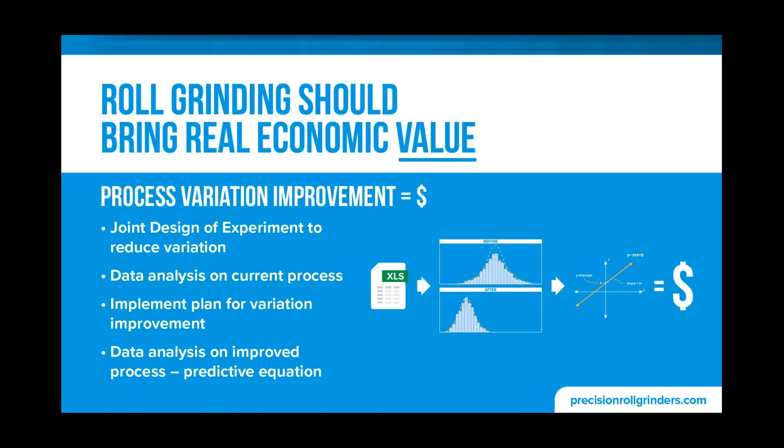We use design of experiments to work with your process and your personnel to really show how specifically we are returning that value in these experiments. These experiments that we do, myself as an application engineer, as well as others that work here, we use the DMAIC process. The design of experiment, the measurement of the current process, so the before and after when we've freshly serviced your rolls or done the grinding on them, and we analyze the data with a Six Sigma process.

Every application engineer and every person who works on these studies is green or black belt certified in Six Sigma. We use Minitab to analyze the data, and with that we can make recommended process changes to help improve the process, and then also to help stabilize or control the process. We've had multiple projects that we have worked on here that we have actually come up with a mathematical equation to predict when your rolls need to be changed out or serviced.

If you leave the rolls in a machine too long, then it's quite possible that you are throwing product away or you are having to slow down your production process. And similarly, with leaving them in not long enough or changing them out early, you are throwing away that money, both in the costs of the shutdown and the product that you're not producing as a result of that shutdown.

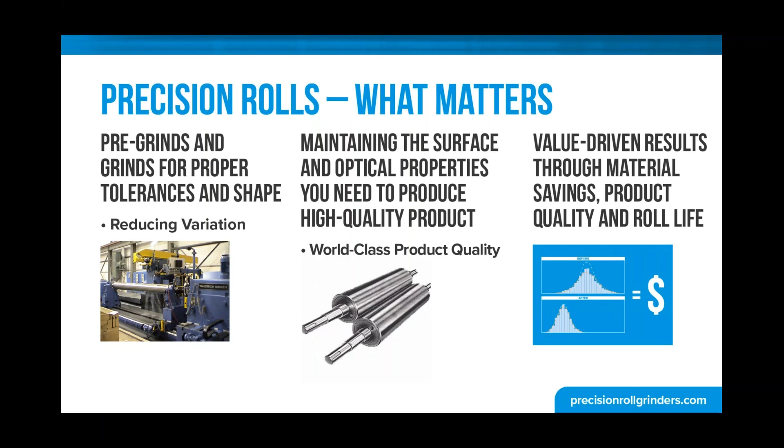I wouldn't say it's overlooked, but a lot of times surface finish is considered something that isn't difficult to do. And while this may be true for some cases, one of the hardest things with the surface finish is being able to do it over and over again consistently. Sometimes it might be able to hit the surface finish here or there, but it's not consistent. We consistently hit the same surface finishes every single time. And then as a result of these world-class services, again, we want to do a study. We want to look at your process and show where that value stream is coming back to you.

So something very unique to PRG is how we grind our rolls. We do not grind rolls in the bearings. The bearings are removed and the rolls are ground on the journals. This is especially critical for those high tolerances because you have the clearances in the bearings and the housings, and you have to eliminate those to get that proper tolerance on your roll. If the bearings are not removed, then it might look in the measurement process that the roll is round, when in reality it's not. Those bearings have to be removed to truly see if that roll is round.

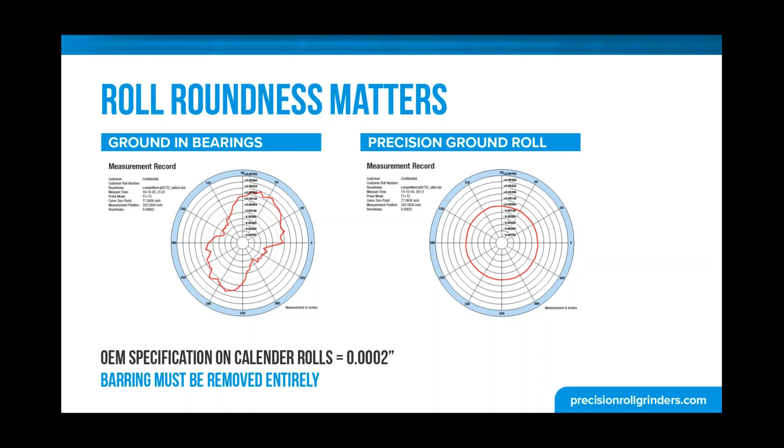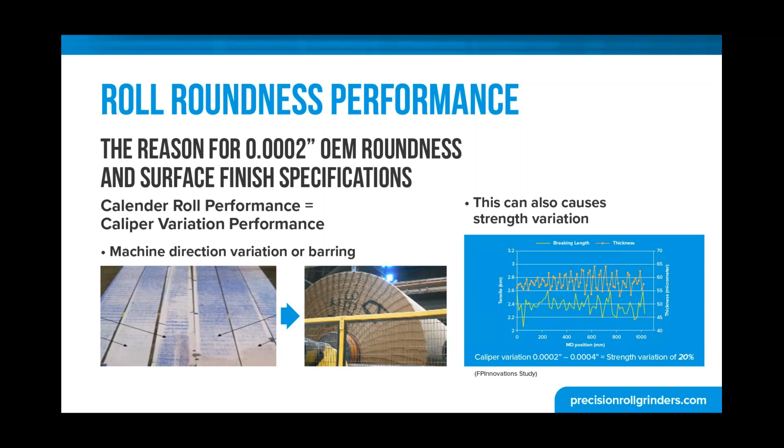Centered roll crowns are also important. In a variety of processes, if the crown is not centered, for example, in a rubber calendering process or any calendering process, you're going to see an inconsistent thickness or caliper in your process. In the paper industry, you might see increased moisture on one side of your web to the other. So that crown is incredibly important; once those rolls are under load, you want them to be completely flat.

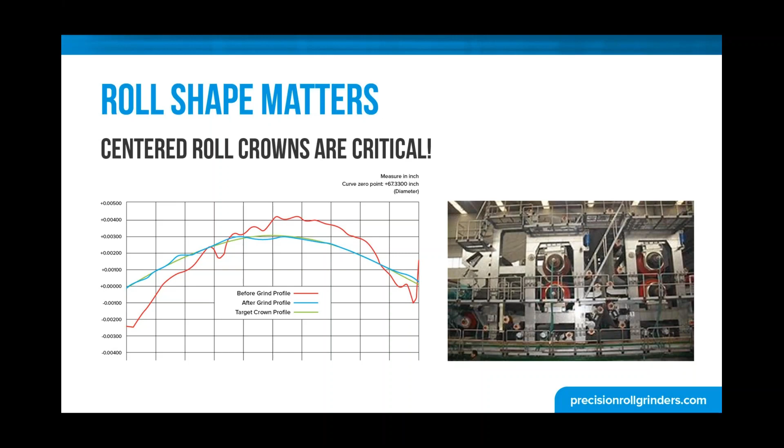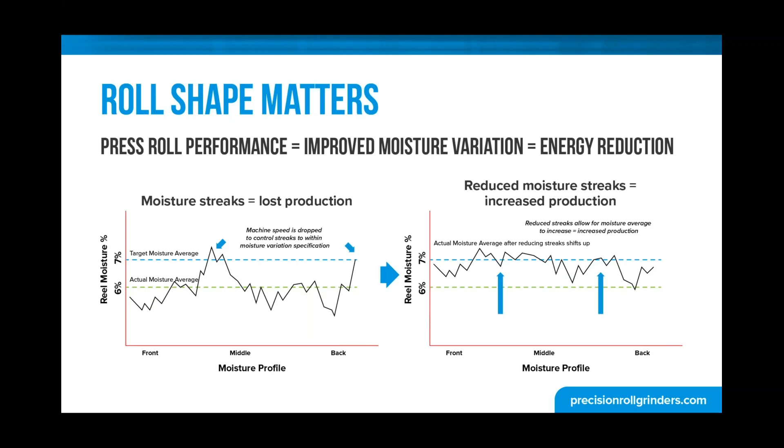PRG is often associated with the calender stack inside a paper machine, but we specialize in all the rolls in that paper machine. Press roll performance is incredibly important in the paper machine. This is directly responsible for a lot of the moisture content in that paper. With proper press roll performance, you're going to reduce those moisture streaks, and as a result, most likely you're going to be able to increase your machine speed, resulting in higher production or increased profits.

It doesn't seem significant. But once you start looking at how much more production, in this case 12 tons extra per day, you end up with a yearly increased production of over $1 million. It adds up very, very quickly, just that slight increase in speed. And one thing that should be said is by reducing those moisture streaks, you're also saving costs in your dryer section. You're not having to dry that moisture out in the dryer section, which can cost a lot of money.

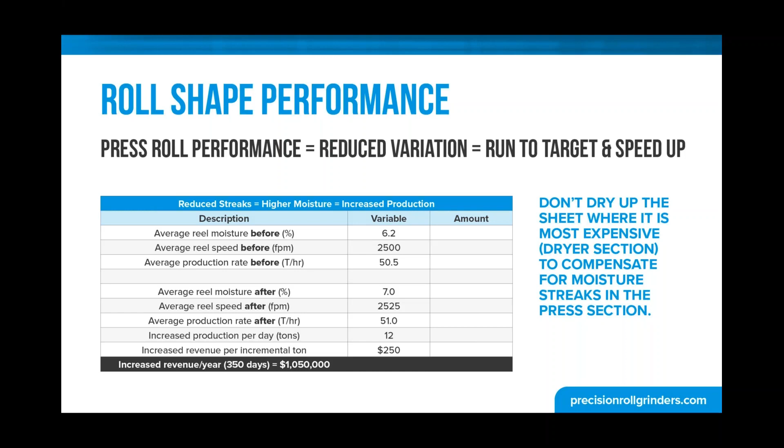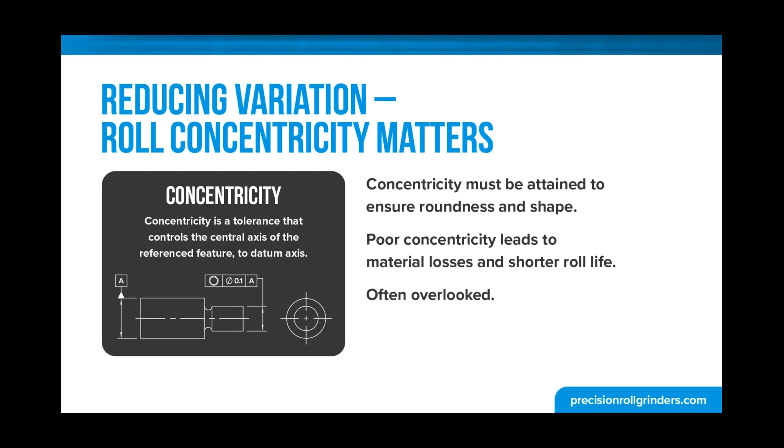Concentricity is something that we take into high account here when we do roll grinds. It's something that sometimes is overlooked or not considered as important as the other dimensions on the roll. And it's incredibly critical. If a roll is not concentric, you're going to experience a lot of the same problems you would see if you had other dimensions that were not ground to the right tolerances. Concentricity is very, very important.

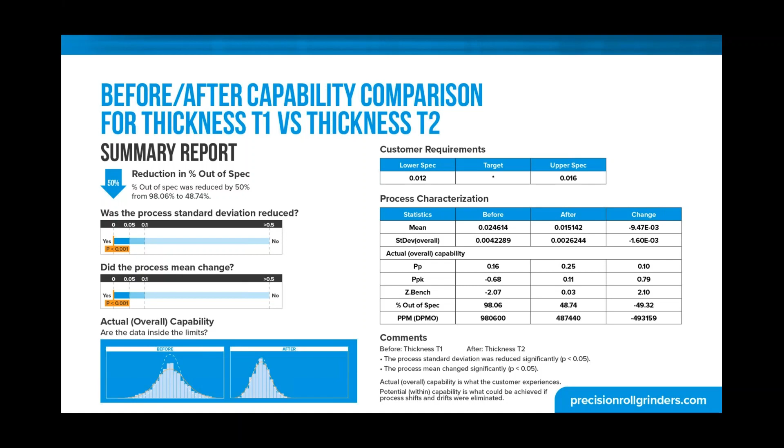This was another study that was done. This was actually in the agricultural industry, and we obtained close to 10,000 data points by hand and analyzed the data. As a result of our roll grinds, we reduced their out-of-spec product by over 50%, which obviously is just a massive gain. And the return on investment here for the cost of the grind was a few days. You can see this throughout all different industries: paper, plastics, rubber, seed oil. You can calculate that return on investment, which is what we want to show you.

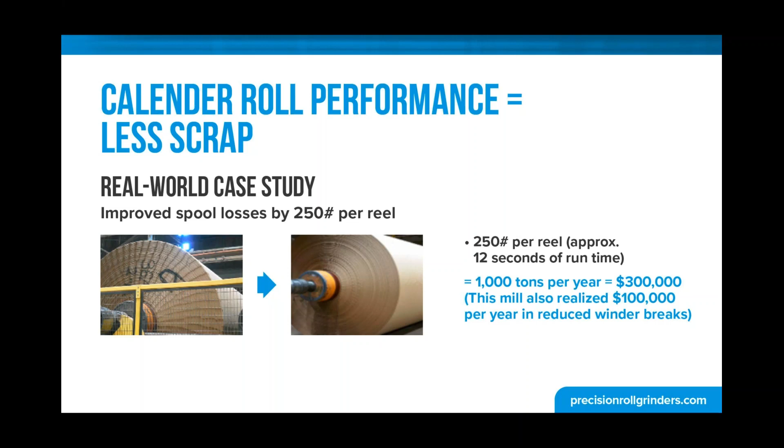So back to the calender rolls with the barring, and the scrap created by barring. You can see an example in that left-hand picture, the corrugation on that reel spool. By having that properly ground calender roll, reducing or eliminating that barring, you see massive savings on reel spool losses. You can run your own numbers and see what kind of savings you're getting, but oftentimes it's upwards of hundreds of thousands of dollars per year just in reel spool savings.

For all our customers, we like to work with them, and sometimes before doing a study and using actual data, we can do an estimate using a simple spreadsheet to see, with our history and other customers, what we might be able to save you, whether it be in scrap or increased production. Now, this is just an estimate, and that's why we like to do those in-depth Six Sigma studies, taking this from being just an estimate to providing you with an actual number of how much you saved or how much increased production or profit was made.

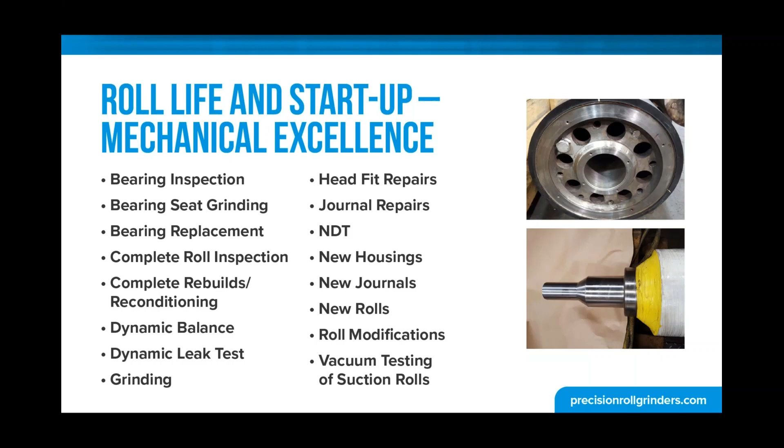At PRG, we are a full service facility, meaning we do everything for rolls. There is very little that we cannot do in-house at a PRG facility. Journal repairs, new roll repairs, old roll damages, NDT testing, non-destructive testing. We can modify existing rolls to fit changes in your process, roll rebuilds with suction rolls, balancing, you name it, it is done in-house at PRG.

Two of the things I want to discuss on that list were bearings in this case. So bearings are very important in your process, just as important as a grind. If your bearing is worn or is damaged, no matter how well that roll is ground, it is not going to run correctly.

So at PRG, we do inspections of the bearings and housings, but on top of that, we bring in the OEM or representatives from your OEM manufacturer for that bearing, and they will do an inspection and provide a report to you as a customer, saying whether or not that bearing is still good to use, all the clearances they've measured, or if the bearing needs to be replaced entirely.

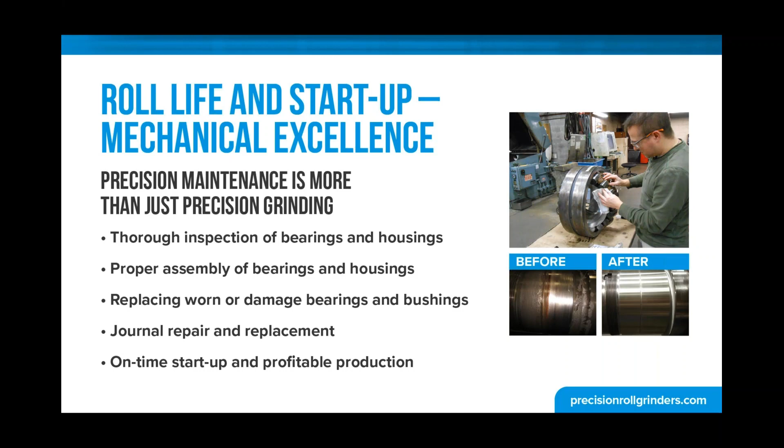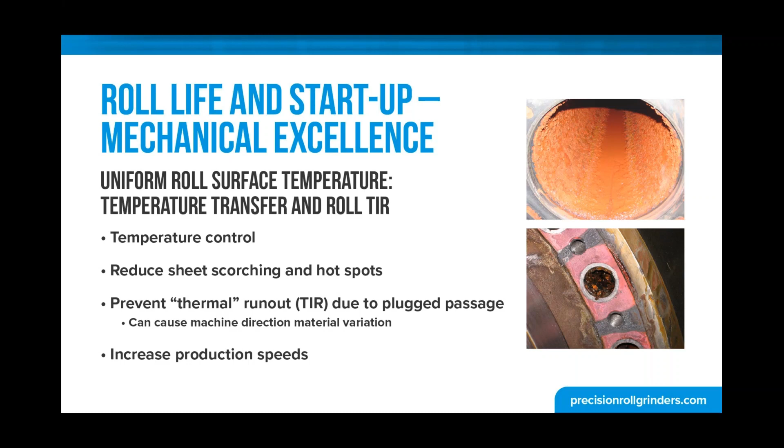This is going to have the same effect as an improperly ground roll, because you have a roll that's enlarging in one spot as a result of the heat. It also reduces the sheet scorching and hot spots, and as a result of all this, you can also increase your production speed.

So obviously with COVID, restrictions are being lifted slowly but surely. However, since this has been going on so long, we understand that there's a change in the way the workforce functions and how we do work with our customers. And as a result, we expect to continue having a virtual partnership with many of our customers. This might be through online conference calls, telephone calls, whatever it might be.

And, obviously, if possible, we want to get in there and see you in person. But again, we're not going to eliminate that virtual partnership, because we understand that that's going to be a continuing thing from here on out in our business.

In addition to that, we also do the virtual value-added services. This goes back to our Six Sigma style studies. In a lot of cases with your production line, you may have data that can be sent via Excel or whatever it might be. We can take this without ever entering your facility and analyze it and send it back to you. We don't have to be there in person to always do these things. So in a case where we cannot enter, we can always do it remotely if possible.

So again, at PRG, we want to show where that value stream is coming as a result of our rolls. We want to do that experiment with you. We want to look at that data and ultimately show you why that grind is an investment to you, and it is increasing profits or reducing scrap and saving you money. At the end of the day, that is what we are looking for.